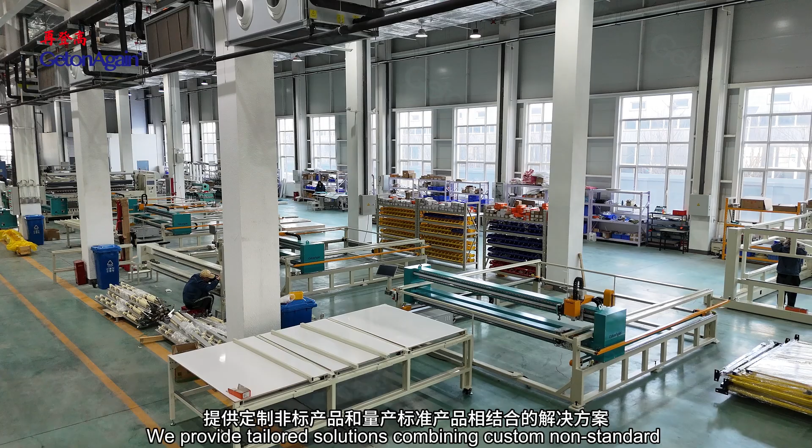We provide tailored solutions combining custom non-standard products with mass-produced standard products, including mechatronic machines, automated production lines, and intelligent factory solutions.

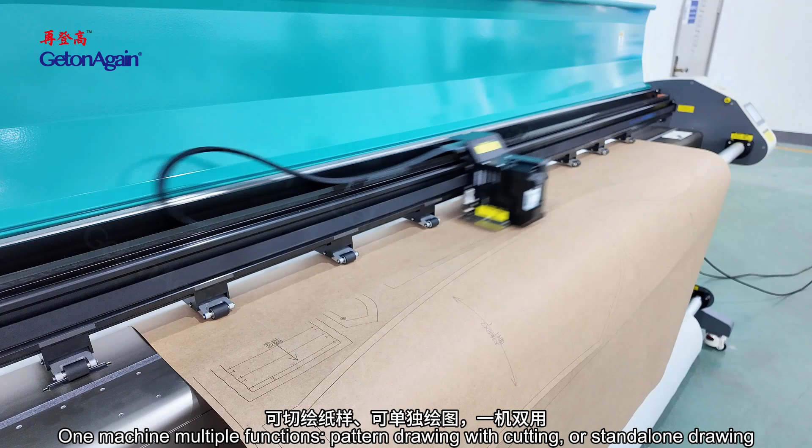Pattern room equipment includes the magnetic inkjet plotter: 2 cartridge version with maximum printing speed at 110 square meters per hour, and 4 cartridge version with maximum printing speed at 200 square meters per hour. The vertical inkjet cutting plotter offers multiple functions in one machine—pattern drawing with cutting, or standalone drawing. Its high-quality rotary cutting knife can cut paper as light as 80 grams per square meter for sample design, saving costs.

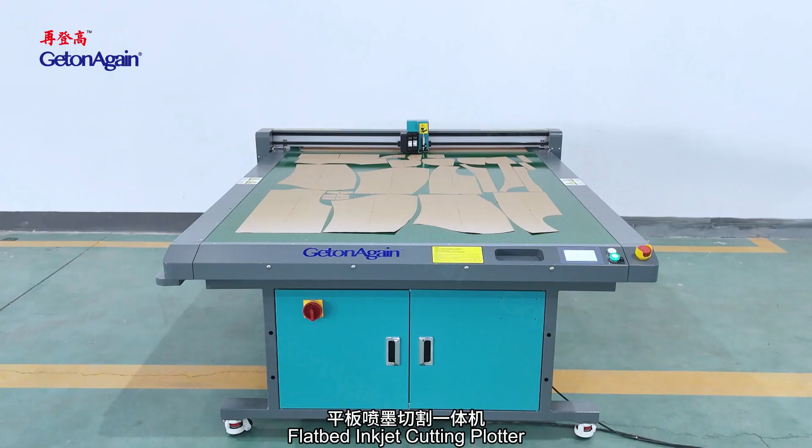The flatbed inkjet cutting plotter offers full speed map printing and cutting function, suitable for personalization. It can be configured with a long knife or short knife, and optional fixed knife sleeve or elastic knife sleeve, suitable for cutting various materials.

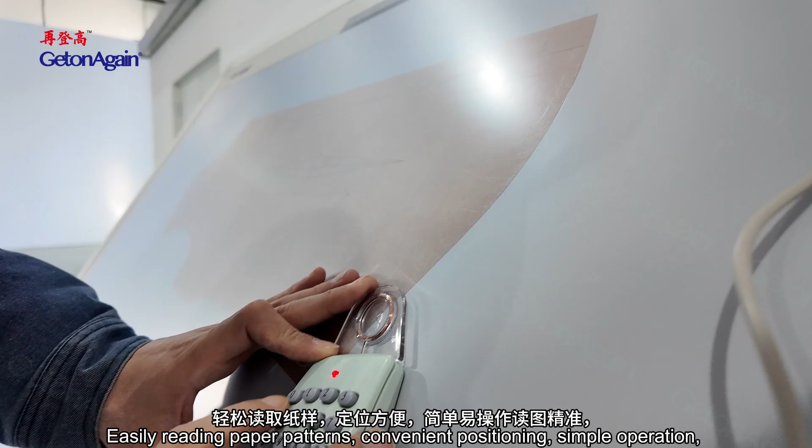The digitizer easily reads paper patterns with convenient positioning and simple operation, accurately reading patterns to speed up design. It is a powerful tool for digitizing traditional manual drawings, and can be used in various fields such as clothing industry, fashion design, surveying and mapping, mining, stamping, and environmental protection.

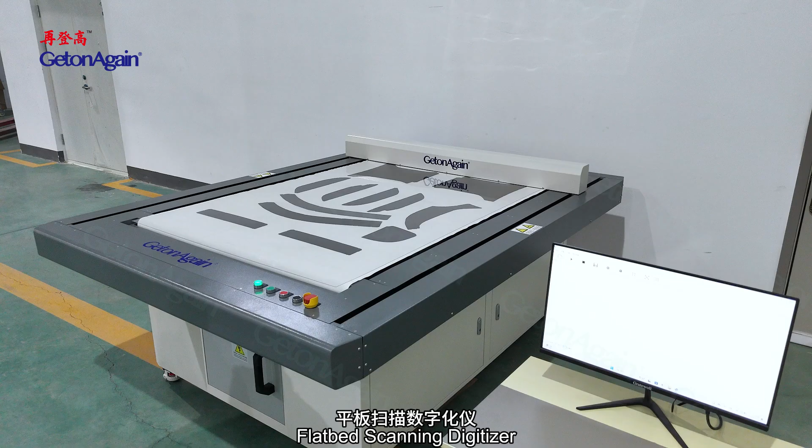The flatbed scanning digitizer starts with one button after placing scanning pieces, using vacuum absorption for auto scanning and auto transmission. Depending on the model, it supports ultra-long width scanning, with scanning speed up to 7,200 mm per minute and scanning resolution of 150 to 300 dpi, producing a high definition panoramic 1:1 image to ensure effective identification of contours, notches, and inner holes.

Cutting equipment includes the automatic spreading machine, which easily sets the spreading method, length, speed, quantity, and sections with intuitive, simple operation. It offers dual use for both knit and woven fabrics, suitable for t-shirts, children's clothing, loungewear, and toy textiles.

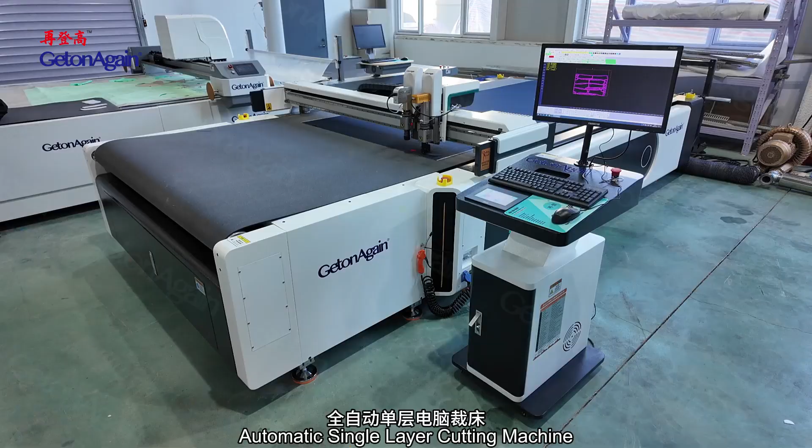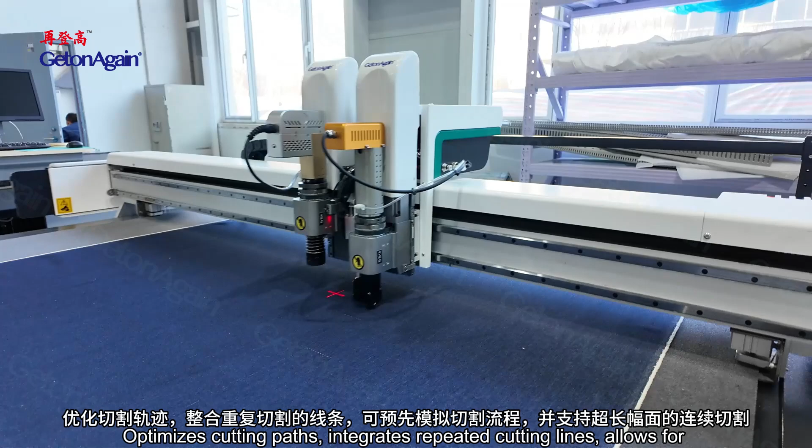The automatic single layer cutting machine requires no specialized cutting molds—cutting can be performed precisely by directly importing CAD design drawings into the equipment. It optimizes cutting paths, integrates repeated cutting lines, allows pre-simulation of the cutting process, and supports continuous cutting for extra long materials.

The stripe and plaid matching cutting machine is equipped with a few HD industrial cameras that, according to capture size, perform intelligent combination, ensuring high accuracy fabric image capturing.

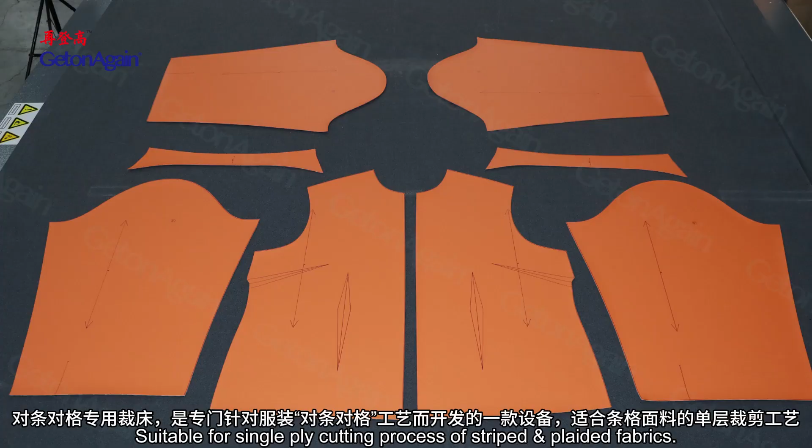The stripe and plaid matching auto cutter is equipped with double knives and pen draw punching working mode, specially designed for various stripes and plaids fabric cutting in single ply. For high-end clothing customization, the effect of the alignment match stripe and plaid process has become an important measurement of quality for this type of clothing. This auto cutter is specially developed to meet matching stripe and plaid clothing requirements, suitable for single ply cutting of striped or plaided fabrics.

The automatic multi-layer cutting machine combines micron-level intelligent sensing components with an intelligent control system to achieve dynamic compensation and correction of cutter deformation during cutting operations, significantly reducing errors between the top and bottom layers of fabric during cutting, enabling truly high-precision intelligent cutting.

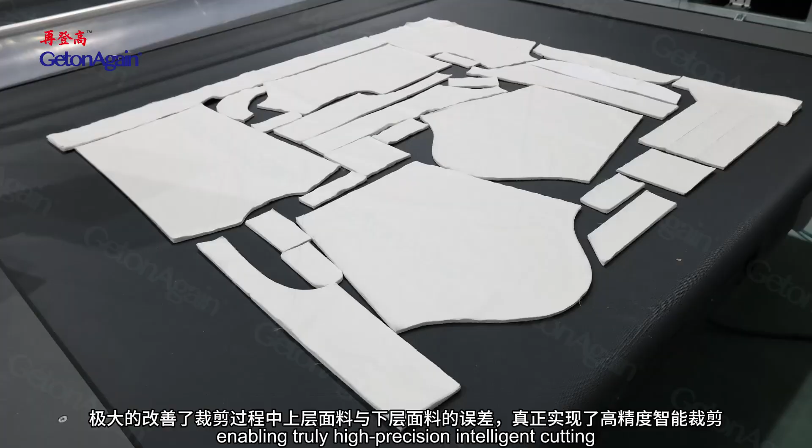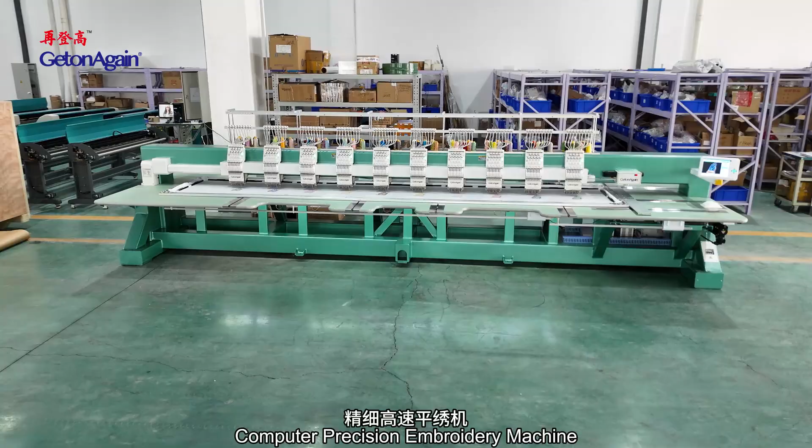Embroidery equipment includes the Cloud Smart Teaching Embroidery Machine, suitable for integrated theoretical and practical teaching of computer embroidery in fields such as fashion and apparel design, clothing design and engineering. The Computer Precision Embroidery Machine features a high-speed sewing head with extremely low failure rates, long service life, low noise, and stable, reliable quality, suitable for embroidering small letters, premium garments, high-end home textiles, footwear, hats, and automotive products with embroidery.

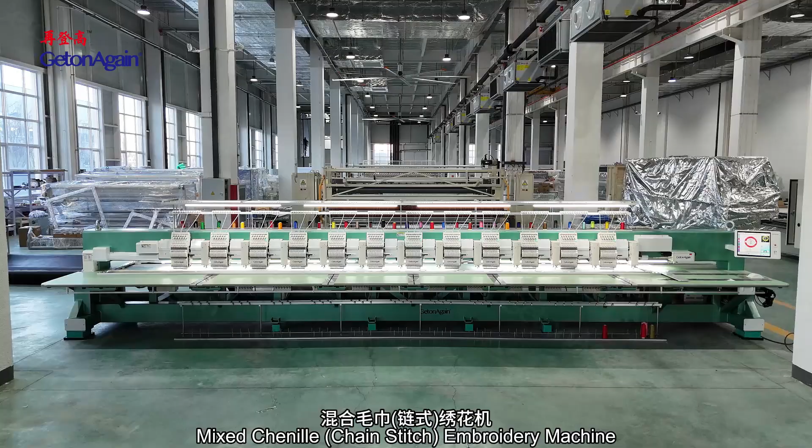The mixed chenille chain stitch embroidery machine features mixed embroidery capability—according to color sequence settings, it can switch between chenille embroidery and flat embroidery, simplifying operation. The chenille needle height can be adjusted across 10 levels according to chenille pile height or chain stitch thread thickness.

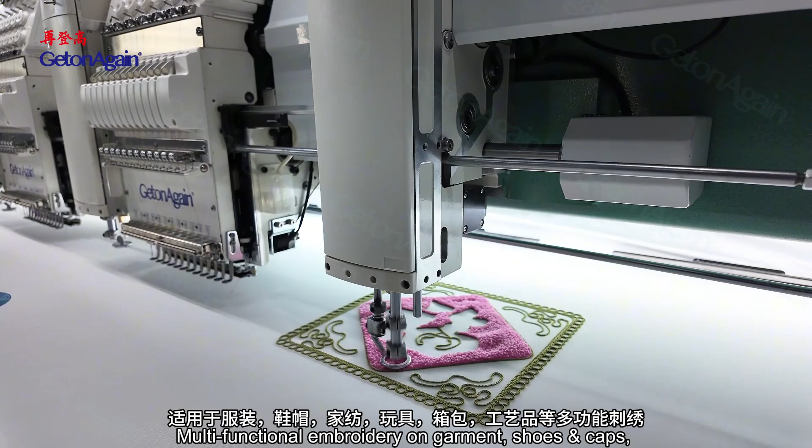This multifunctional embroidery machine works on garments, shoes, caps, home textiles, toys, bags, luggage, and art crafts. The multi-head tubular embroidery machine series is suitable for embroidering flats, caps, garments, shoes, belts, and bags.

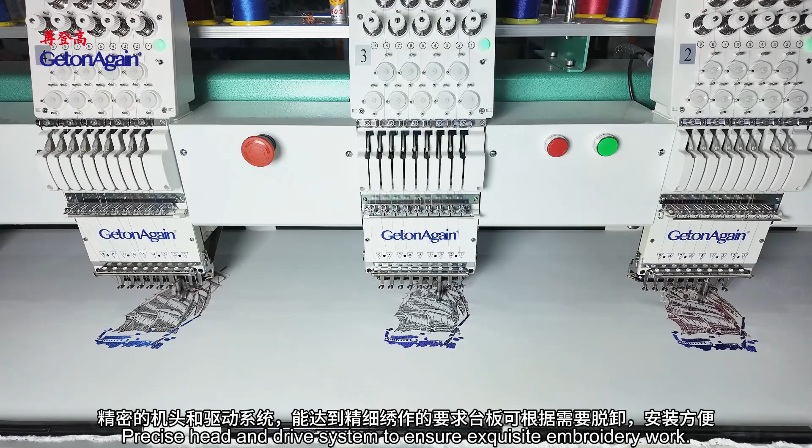Features include auto thread trimmers, auto color change, auto thread break detection, a 270 degree wide angle cap system, red light locating, LED lighting, and a precise head and drive system to ensure exquisite embroidery work. Drop tables are easy to lift up and down. Multiple heads greatly improve work efficiency, suitable for embroidery shops and factories of a certain scale.

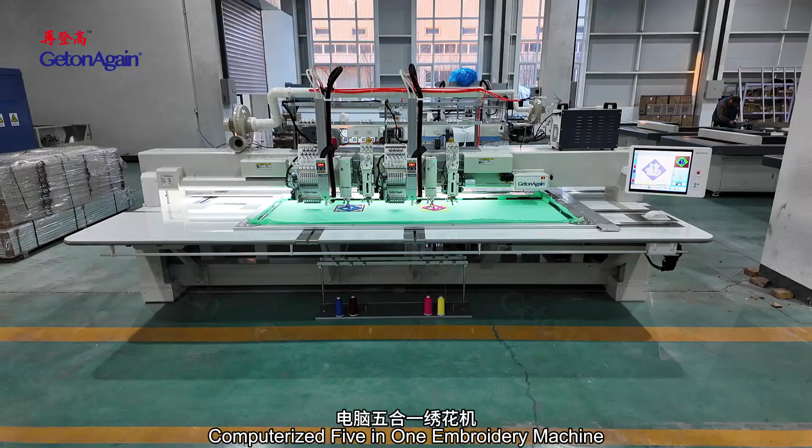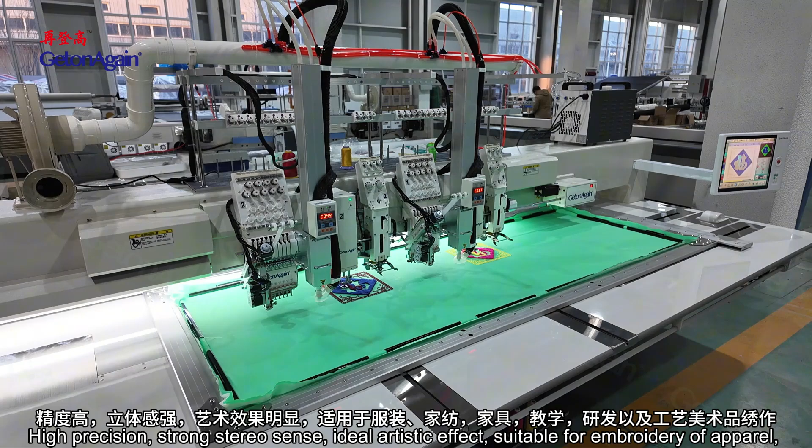The computerized 5-in-1 embroidery machine integrates five functions in one machine: flat embroidery, quilting, tape cording embroidery, chenille and chain stitch embroidery, double sequin device, and laser cutting function. It delivers high precision, strong stereo sense, and ideal artistic effect, suitable for embroidery of apparel, home textile, furniture, teaching, design, and arts and crafts.

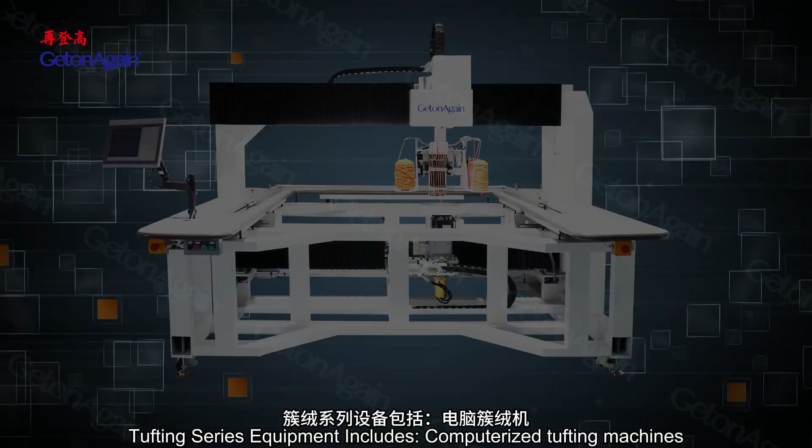Tufting series equipment includes computerized tufting machines with a rotary tufting head that moves at any angle, avoiding positive-negative stitching difference, for higher efficiency and better tufting results. Suitable for various rugs, carpets, hanging carpets, tapestries, and other flooring decorative and home furnishing products.

Laser equipment includes the small format camera positioning laser engraver cutting machine, which supports survey recognition processing with options for full sheet recognition followed by cutting, or simultaneous recognition and cutting. It features multi-template mixed cutting, allowing recognition and positioning of different patterns to be completed in a single operation.

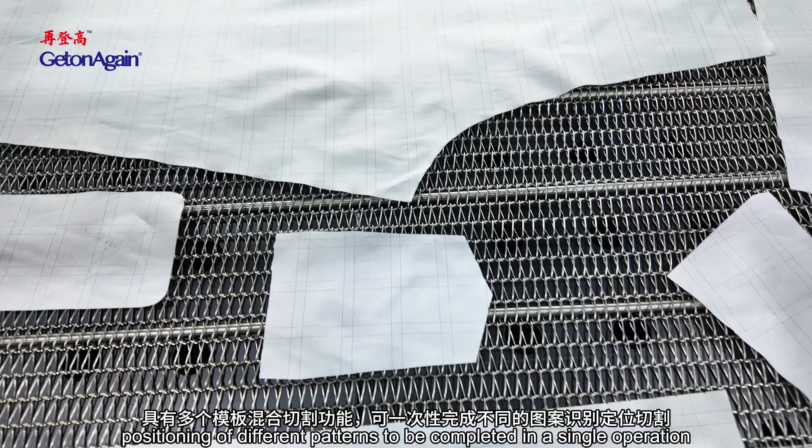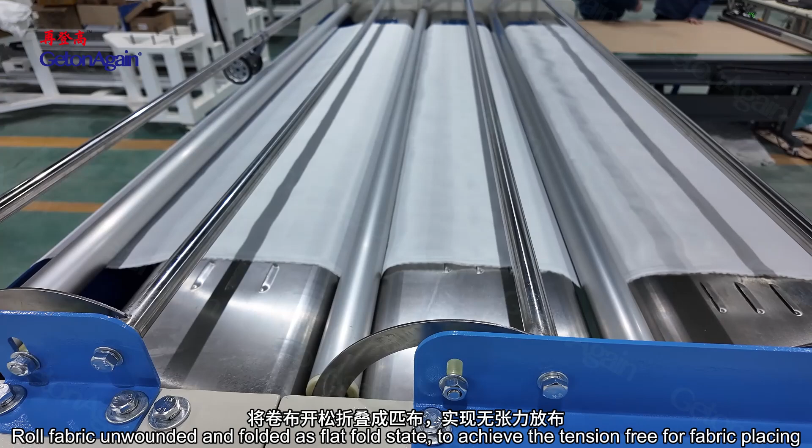Pre-sewing auxiliary equipment includes automatic edge alignment, relaxing machine, and air blowing. Roll fabric is unwound and folded in a flat fold state to achieve tension-free fabric placing. A wave-type air blowing device relaxes the fabric during the loosening process.

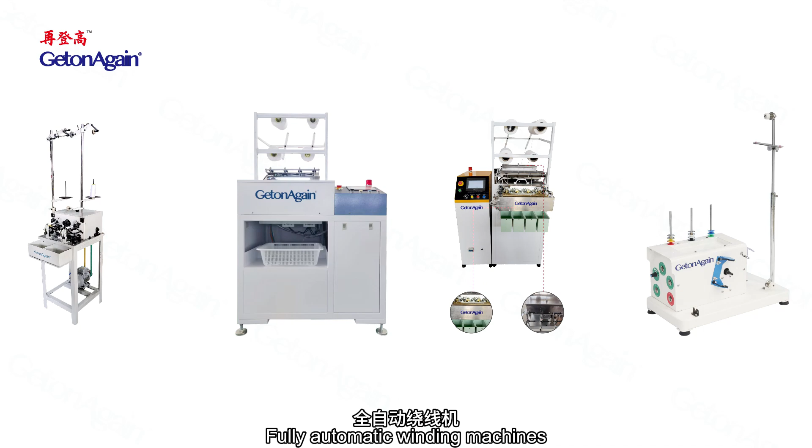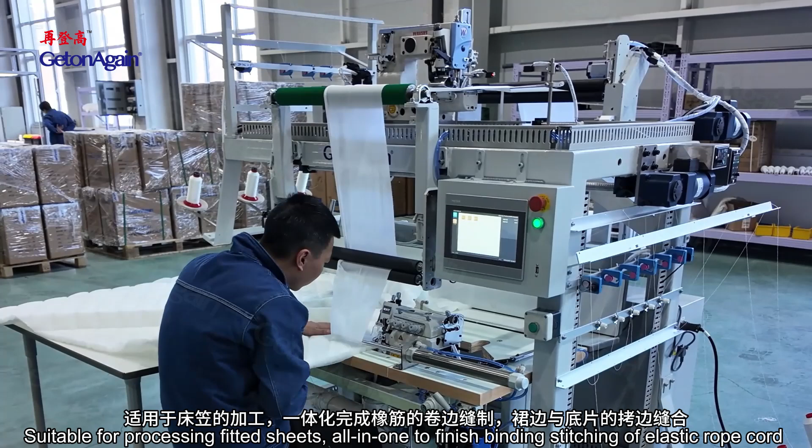Fully automatic winding machines. Sewing equipment includes an automatic mattress protector skirting sewing machine with interlock and overlock, suitable for processing fitted sheets, all-in-one to finish binding stitching of elastic rope cord and bed skirt, and overlocking of bed skirt to mattress protector topper layer.

Pattern sewing machine. This machine can easily sew 1200D thick thread with a thickness of 12mm, features a 2 times large rotary hook, automatic thread trimming, and a maximum sewing speed of up to 2500 RPM.

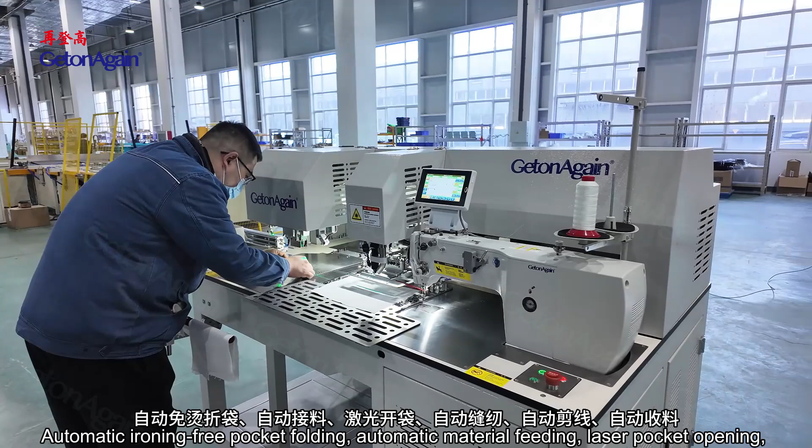Automatic laser pocket opening machine: automatic ironing-free pocket folding, automatic material feeding, laser pocket opening, automatic sewing, automatic thread trimming, and automatic material collection.

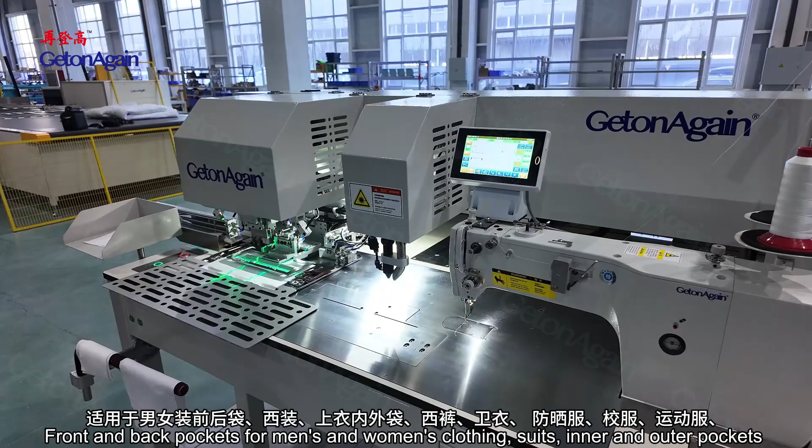Used for front and back pockets for men's and women's clothing, suits, inner and outer pockets of jackets, dress pants, hoodies, sun protection clothing, school uniforms, sportswear, cotton padded jackets, down jackets, workwear, jackets, uniforms, trench coats, cashmere coats, blankets, and polo shirts. Quilt edge binding machine.

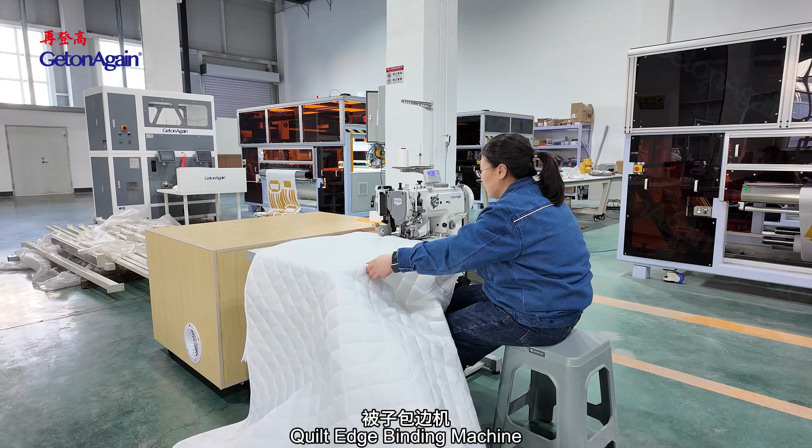Features single needle compound feed, achieving cutting, binding, and sewing in one seamless operation. An enlarged right side waste discharge port with pneumatic waste discharge assistance ensures smoother disposal of waste generated during edge cutting.

Special synchronized feeding structure, including alternating presser foot, needle, feed dog, and binding attachment, ensures no wrinkles or misalignment during straight line or corner sewing, for a flawless binding effect.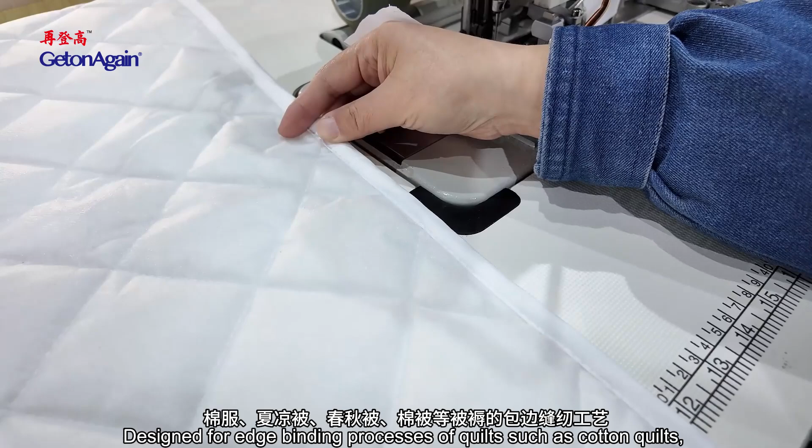Designed for edge binding processes of quilts, such as cotton quilts, summer quilts, spring and autumn quilts, and other bedding items.

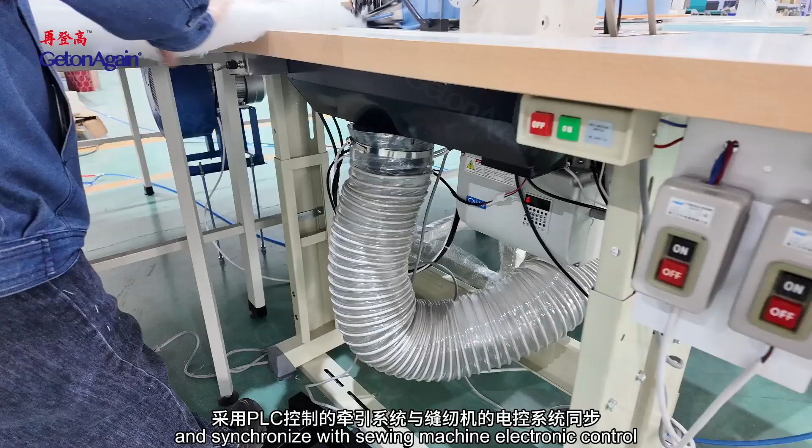Quilt and mattress binding with pulling sewing workstation. Equipment factory standard provides an air floating table and automatic pulling device, making the sewing worker's operation easier and smoother. Equipped with PLC controlled pulling device synchronized with sewing machine electronic control, these two machines work at the same speed and synchronize direction.

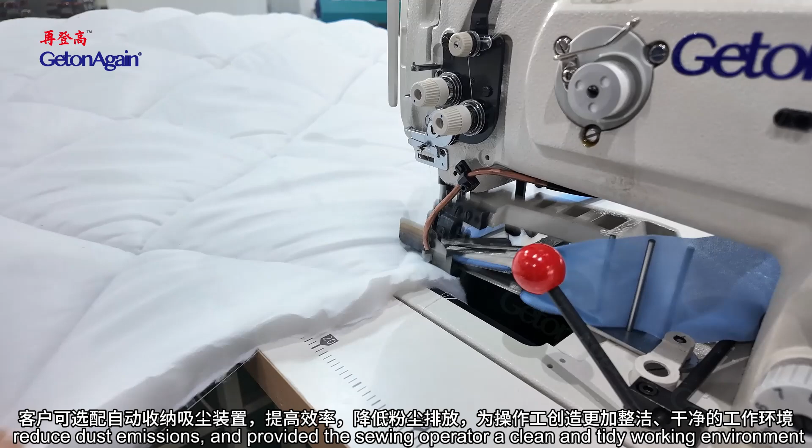An optional automatic storage and vacuuming device improves efficiency, reduces dust emissions, and provides the sewing operator a clean and tidy working environment. The binding result is rich and has a strong, solid feel. Corners are smooth and nice, with evenly stitched length, no hairy edge, no edge folding, and no corner raising effect or other negative symptoms.

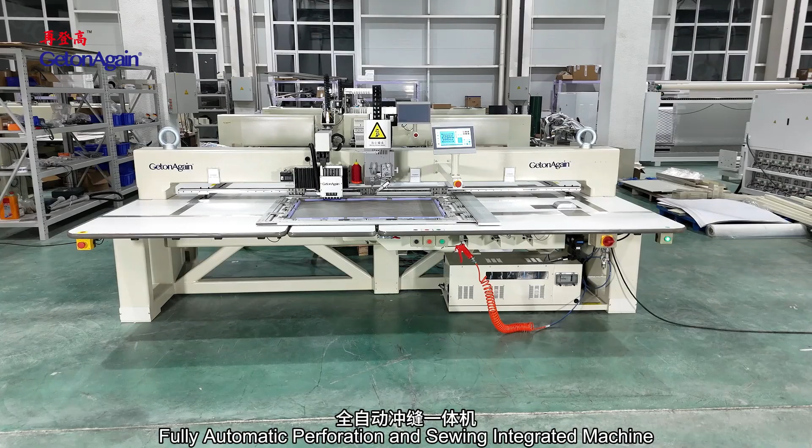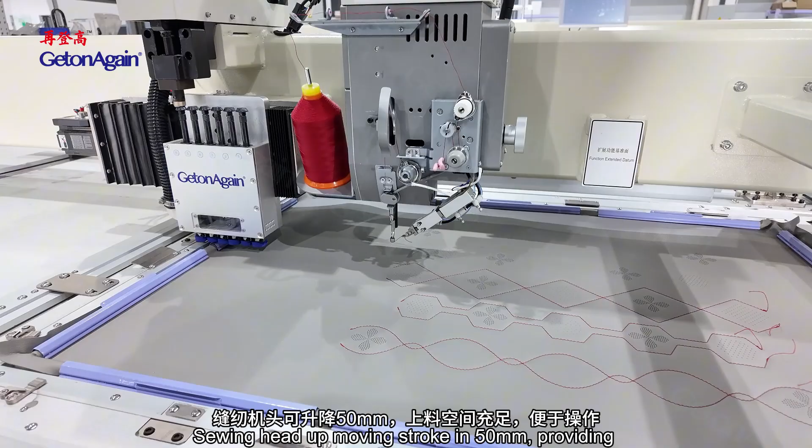Fully automatic perforation and sewing integrated machine. The punching machine head is specifically designed and developed for leather materials, equipped with various round punching tool specifications. Sewing head up-moving stroke is 50mm, providing sufficient space for material loading and easy operation.

Suitable for perforation and sewing processes of various types and thicknesses of genuine leather and microfiber leather used in car seats, automotive interiors, aircraft seats, luggage, furniture, and more.

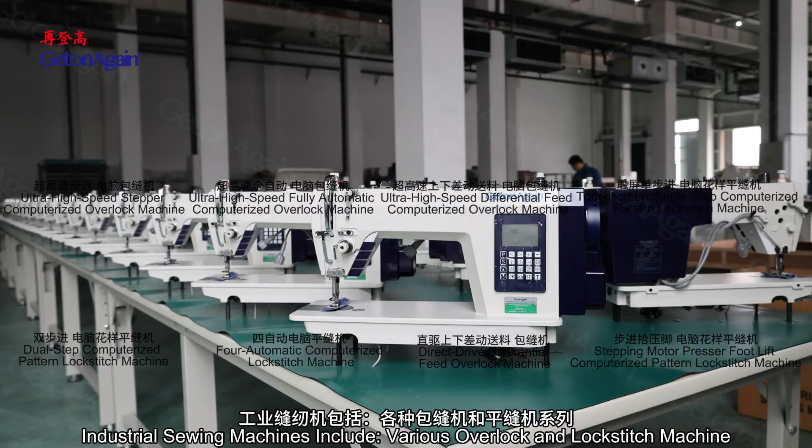Multi-hole bar tacking machine: press arm and sewing frame work synchronously, ensuring high precision bar tacking, suitable for chair pads, cushions and pillows, and all items with fillings requiring bar tacking for reinforcing sewing work. Industrial sewing machines include various overlock and lock stitch machines.

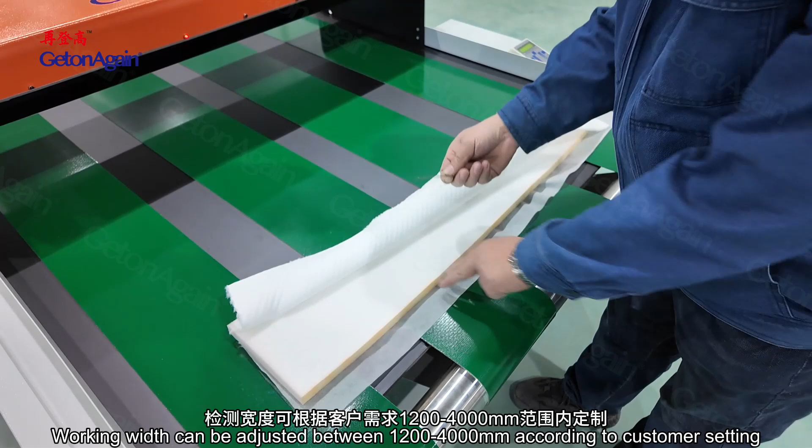Post-finishing equipment includes a needle detector, applicable for large bulky products requiring ferromagnetic metal detection, for example bedding. Working width can be adjusted between 1,200 to 4,000mm according to customer setting.

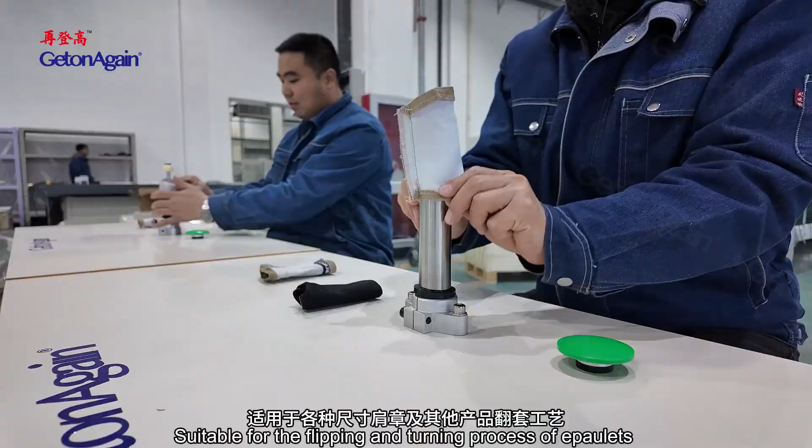Epaulet flipping machine replaces manual operation with high efficiency, safety and reliability, suitable for the flipping and turning process of epaulets or straps of various sizes and other products.

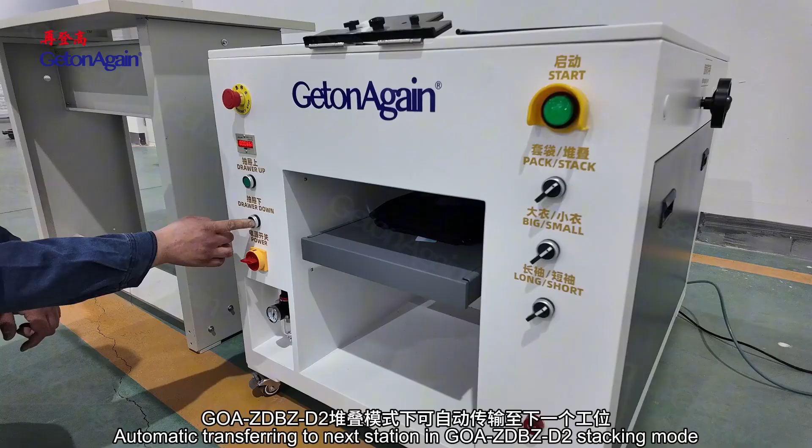Automatic folding and packaging machine: economical, small floor space, simple operation, standard folding effects, with automatic transferring to the next station in GOA-ZDBZ-D2 stacking mode. Two working modes, bagging and folding, are adjustable, and both folding width and length are adjustable within a certain range.

Suitable for T-shirts, polo shirts, hoodies, thermal wear, pants, and lightweight jackets, etc.

Single and dual heads cap pressing machine for baseball caps. Steam time, cap clamping time, steam output, and air consumption can all be automatically adjusted. A built-in steam generator eliminates the need for an external boiler, with automatic water supply, suitable for bulk order production needs. Using a robotic arm, it can automatically grip the cap.

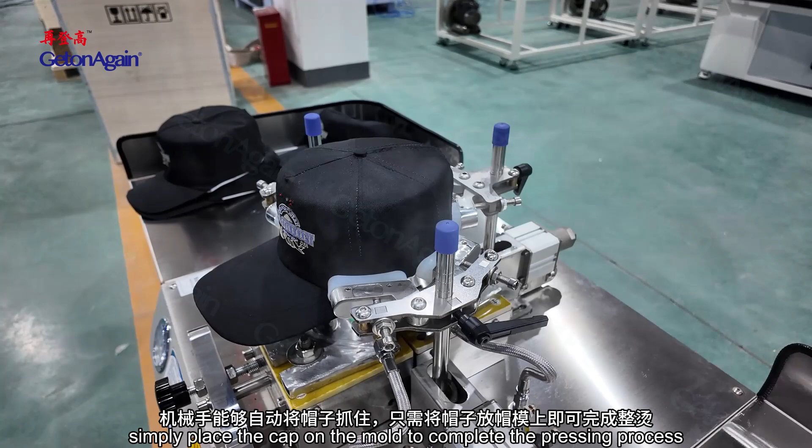Simply place the cap on the mold to complete the pressing process.

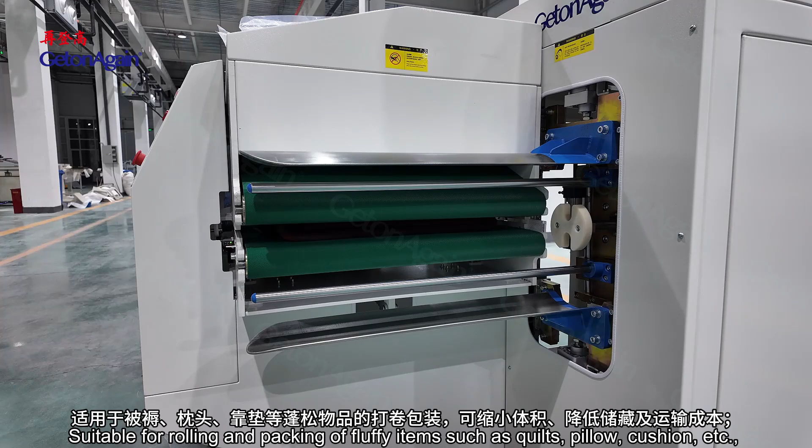Quilt roll packing machine, suitable for rolling and packing of fluffy items such as quilts, pillows, cushions, etc., to reduce volume and storage, as well as lower transportation cost. The packing item is auto-fed from backward to forward by the belt during the compressing process and rolled to pack into the bag.

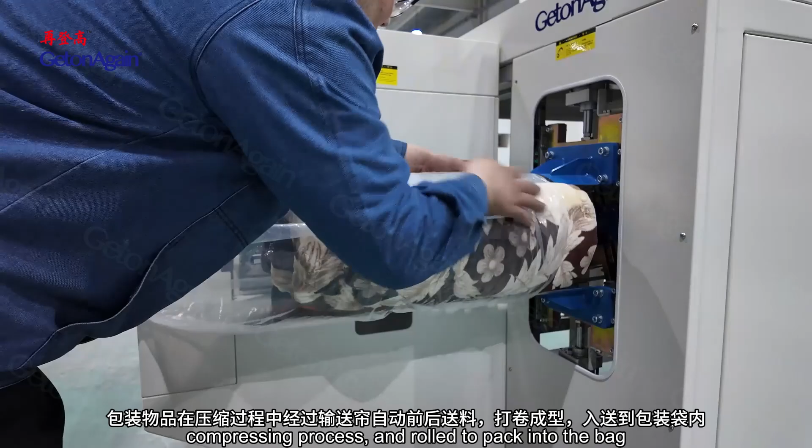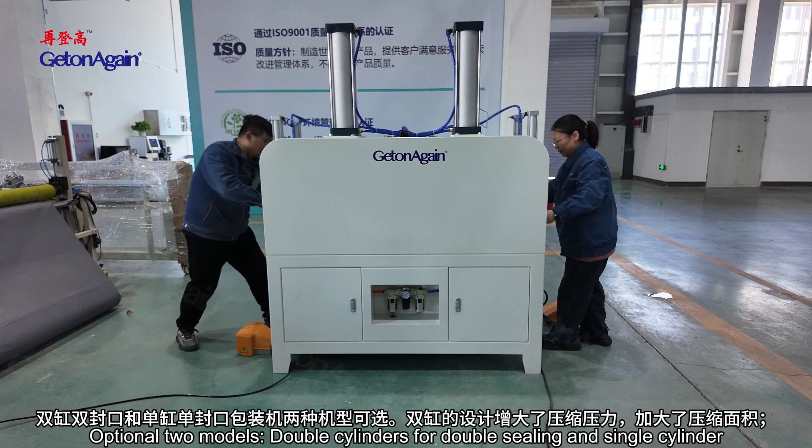Double cylinders, double operation, optional models: double cylinders for double sealing, single cylinder for single sealing. The double cylinder design increases the compression pressure and area. In double seal design, two workers operate two products at the side of the machine, greatly improving work efficiency, suitable for compressed packing of pillows, cushions, bedding, plush toys and other products.

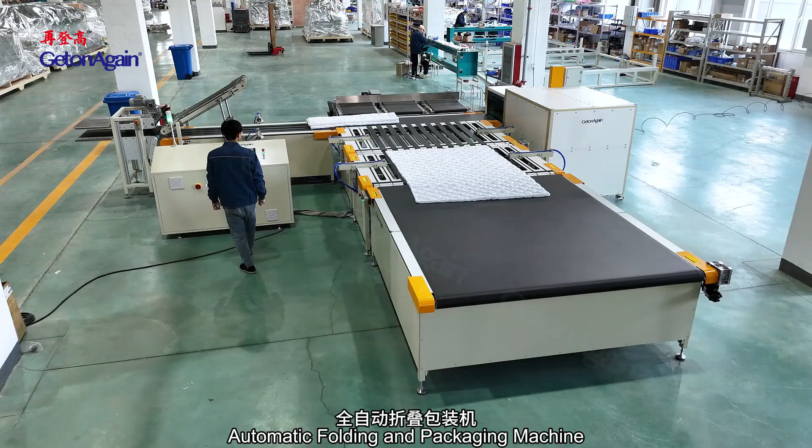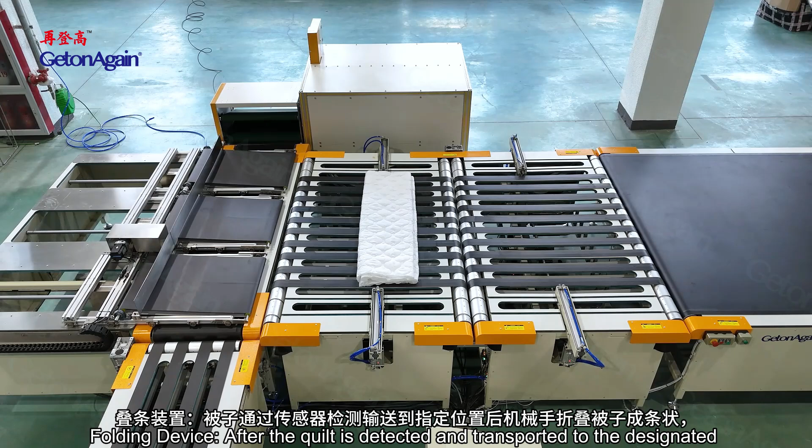Automatic folding and packaging machine, the equipment is mainly composed of a folding device, rolling device, and stacking and compressing conveyor device. In the folding device, after the quilt is detected and transported to the designated position by sensors, a robotic arm folds the quilt into a strip shape.

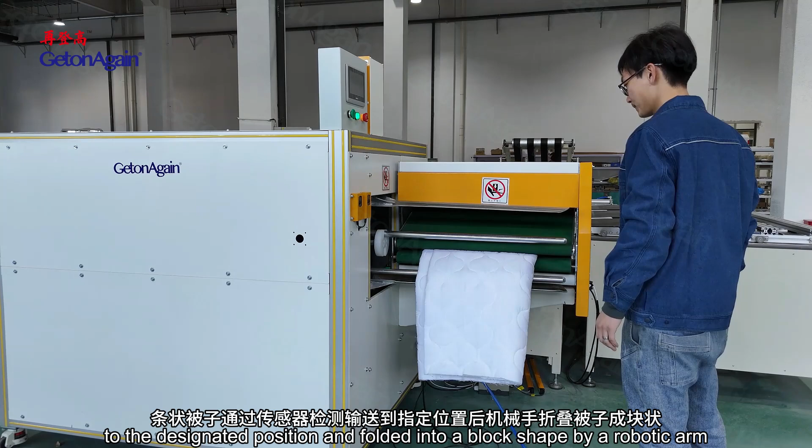After being detected by sensors, the strip-shaped quilt is transported to the designated position and folded into a block shape by a robotic arm. In the rolling device, the strip-shaped quilt is transported to the automatic rolling device to complete the rolling process.

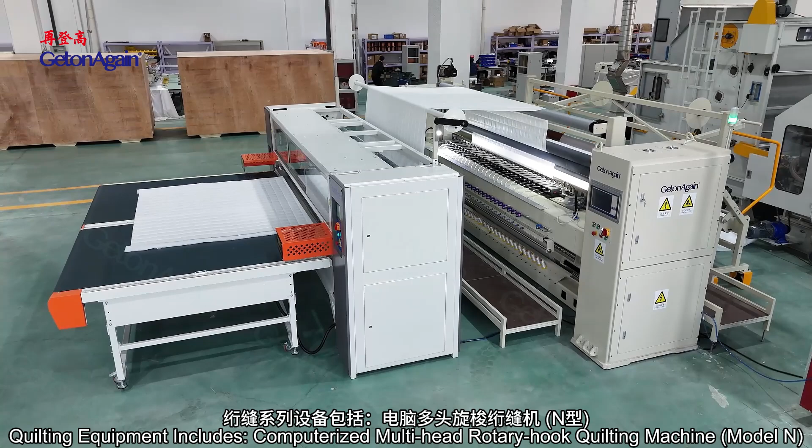Quilting equipment includes the computerized multi-head rotary hook quilting machine model N, a double row lock stitch multi-head quilter with large rotary hook. Max speed of 1,500 RPM, more than 2 to 3 times that of a normal shuttle quilting machine, greatly improving work efficiency. Three-fold capacity rotary hook means less bobbin changing frequency, beautiful stitches, no lost stitch, no thread loops.

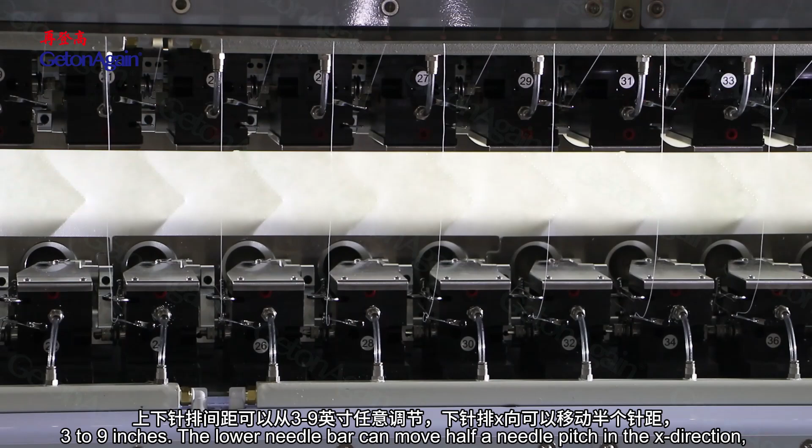Computerized multi-head rotary hook quilting machine model E features a 5-time jumbo rotary hook, less bobbin changing frequency, beautiful stitches, no lost stitch, no thread loops. The interval between the upper and lower needle bars can be adjusted to any value from 3 to 9 inches. The lower needle bar can move half a needle pitch in the X direction, so that quilting needle bars of different sizes and patterns can be combined, especially for some non-standard size patterns, achieving a unique effect.

Computerized multi-needle shuttle quilting machine with flying shuttle, for quilting of fitted sheets, bed covers, summer quilts, and clothing products with quilting pattern.

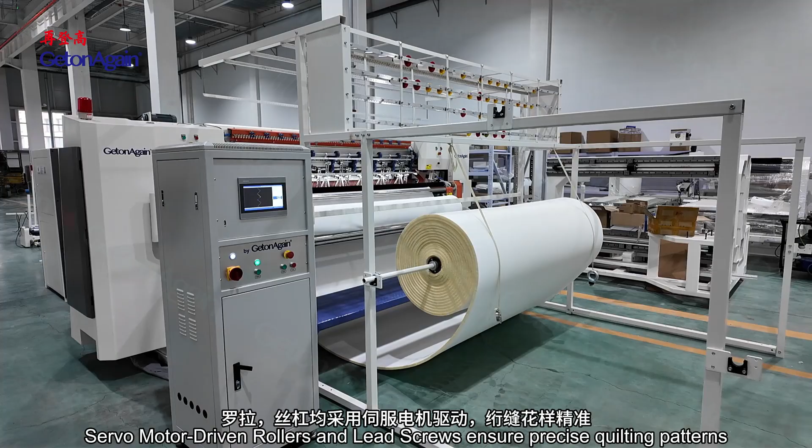Computerized multi-needle chain stitch quilting machine. Servo motor-driven rollers and lead screws ensure precise quilting patterns, suitable for mattresses, mattress covers, sofas, bedding, home textiles and home decor.

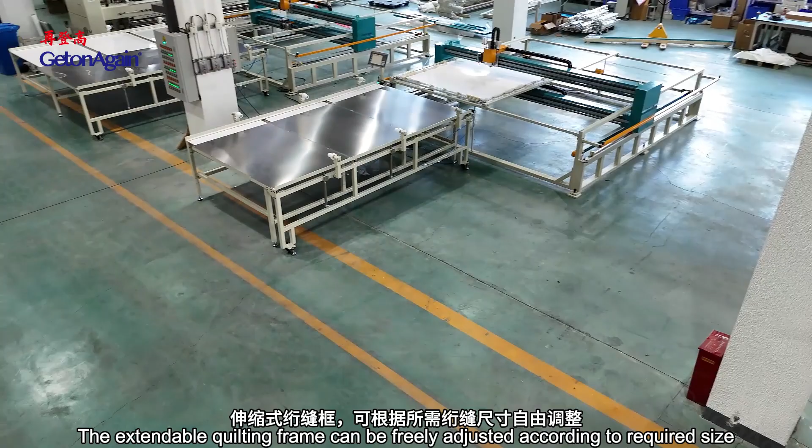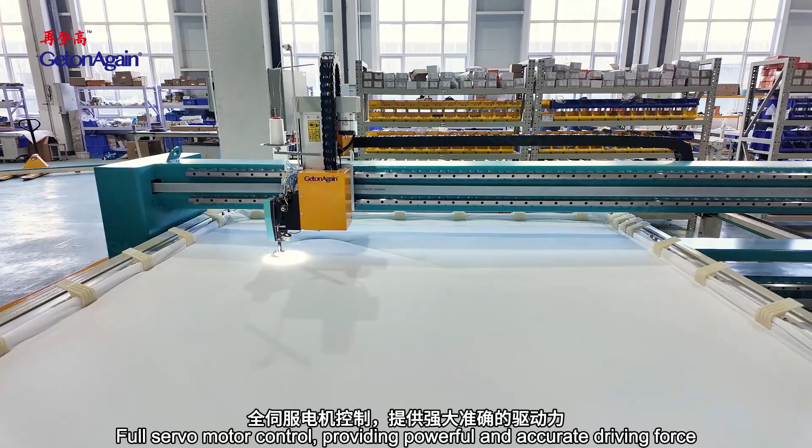Computerized single-needle quilting machine lifting head. The extendable quilting frame can be freely adjusted according to required size. GetonAgain quilting head with independent presser foot drive, suitable for various materials with different thickness. Full servo motor control provides powerful and accurate driving force. Automatic lifting head allows easy change of the frame after finishing quilting.

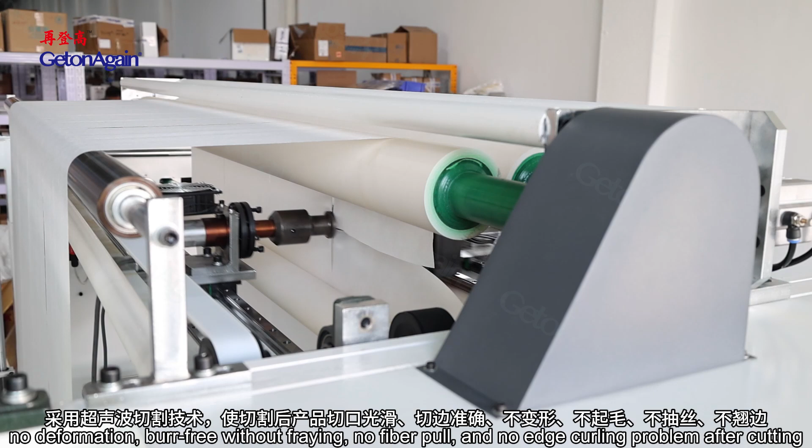Ultrasonic equipment includes the ultrasonic slitting machine, which adopts ultrasonic cutting technology ensuring smooth cutting edges, precision edge cutting, no deformation, burr free without fraying, no fiber pull, and no edge curling problem after cutting. Cutting rollers and patterns can be customized to meet various needs.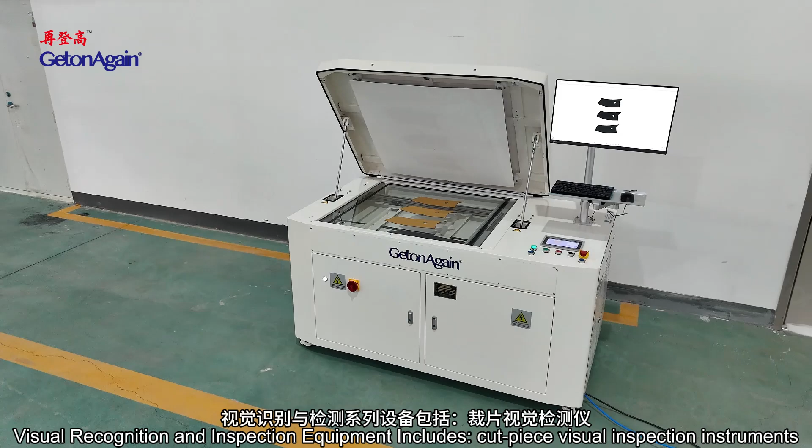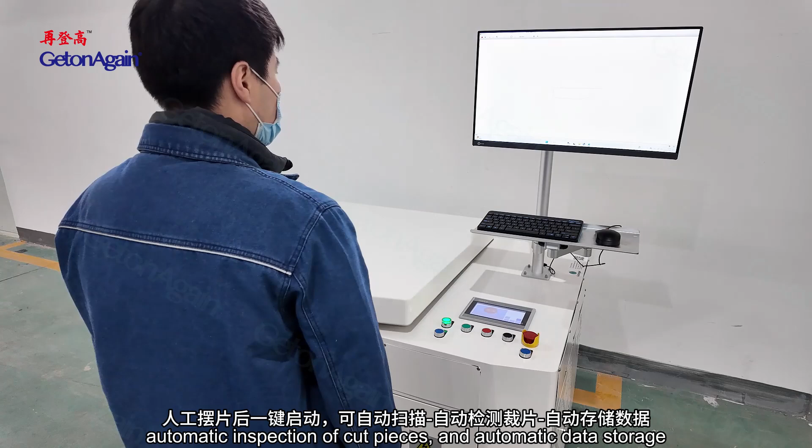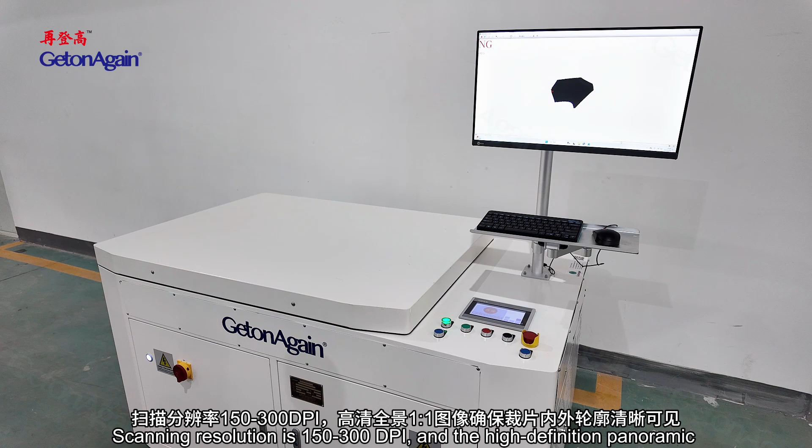Visual recognition and inspection equipment includes cut piece visual inspection instruments. After manual placement, one-click start allows for automatic scanning, automatic inspection of cut pieces, and automatic data storage. Scanning speed can reach up to 120 mm per second, with no need for additional lighting, ensuring reliable use in all weather conditions. Scanning resolution is 150 to 300 dpi, and the high-definition panoramic one-to-one image ensures that the inner and outer contours of the cut pieces are clearly visible.

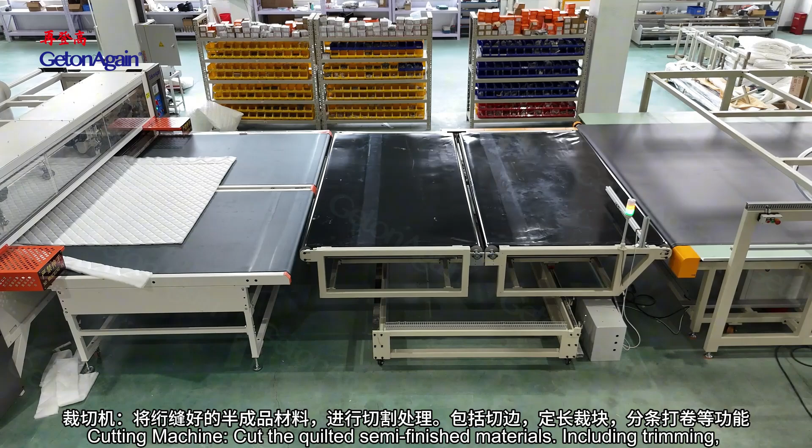Automated production line series includes the multi-needle quilting machine, flying shuttle and cutting machine, and 4-side tape binding machine production line. The multi-needle quilting machine quilts and fixes the raw materials with lock stitches, mainly used to process quilt cores and cushions. The cutting machine cuts the quilted semi-finished materials, including trimming, fixed length cutting, slitting and rolling, and other functions.

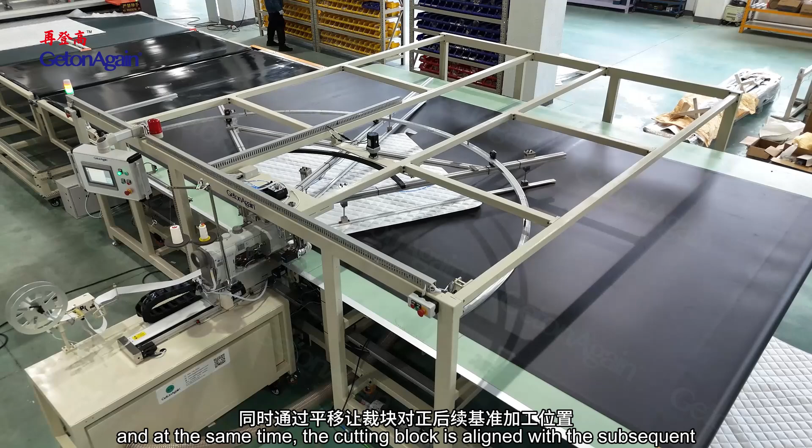Alignment platform: a material transfer alignment mechanism. The cutting block waits to enter the next sequence on this platform, and at the same time, the cutting block is aligned with the subsequent reference processing position by translation.

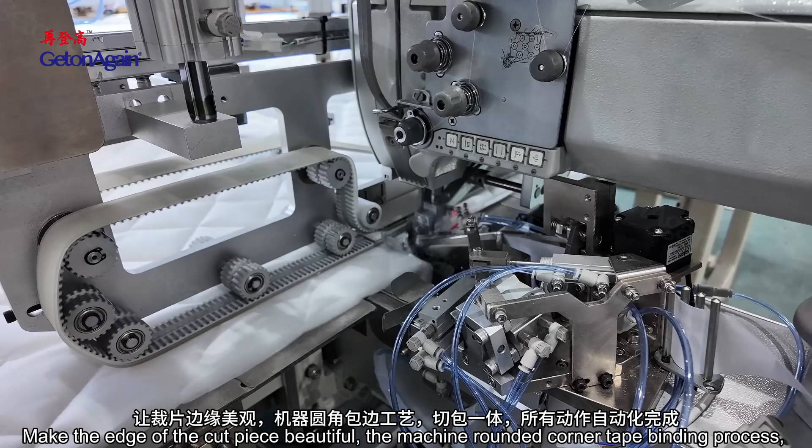Automatic tape binding machine: the cutting piece is processed by the tape binding machine to make the edge of the cut piece beautiful, using a machine rounded corner tape binding process. The cutting and tape binding are integrated, and all actions are completed automatically.

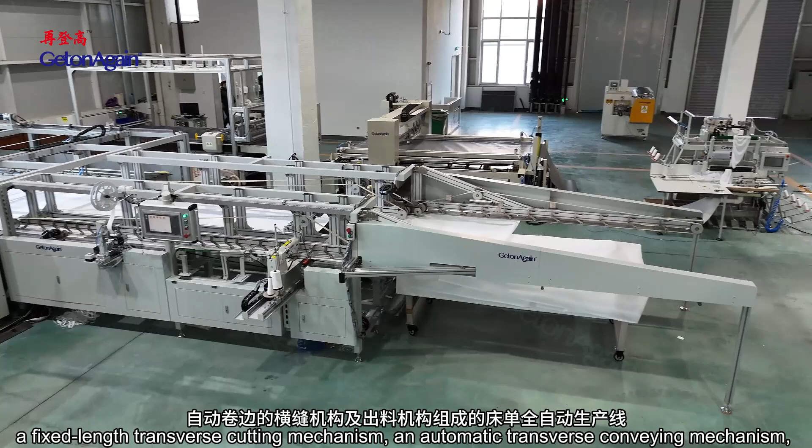Automatic bed sheet production line: a fully automated bed sheet production line composed of a feeding mechanism, an adjustable width longitudinal sewing mechanism, a fixed length transverse cutting mechanism, an automatic transverse conveying mechanism, an automatic hemming transverse seam mechanism, and a discharging mechanism.

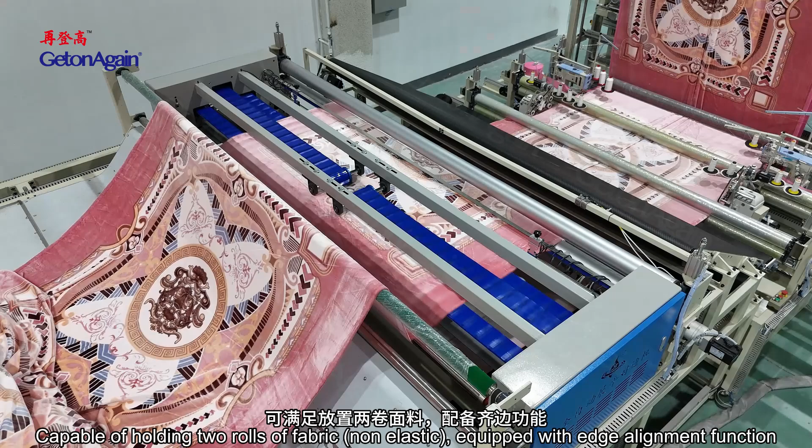Automatic blanket straight corner binding machine, capable of holding 2 rolls of non-elastic fabric, equipped with edge alignment function, automatically pulls and cuts into panels. Pulling lengths can be set freely. 4-side tape binding sewing process for inelastic blankets.

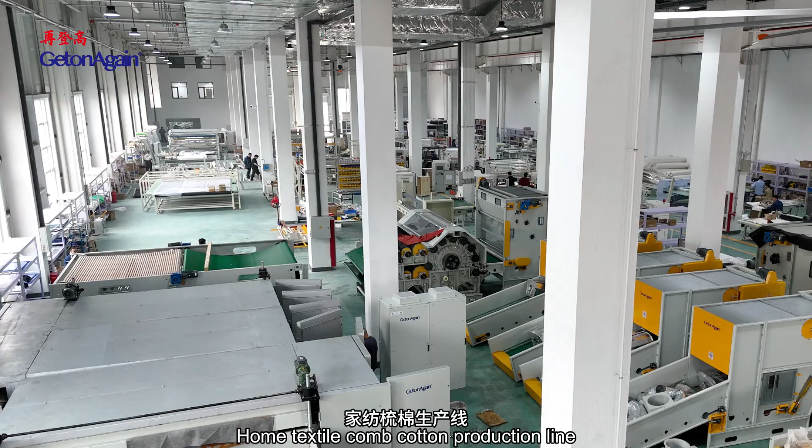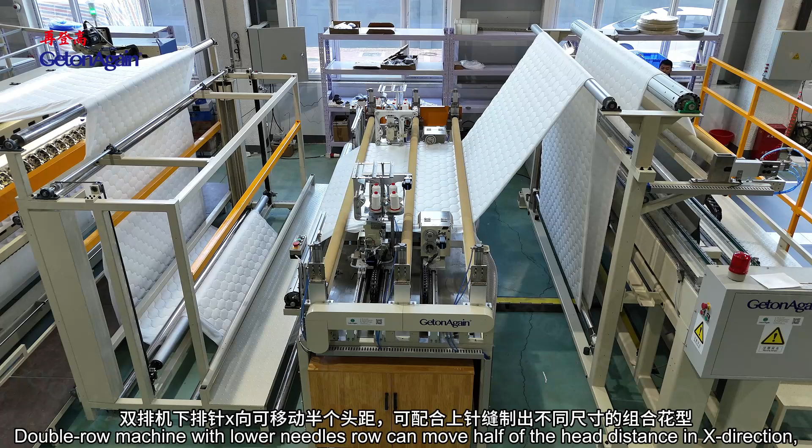Hometextile comb cotton production line. Computerized multi-head rotary hook quilting machine and 4-side edge sewing machine are capable of quilting patterns in various sizes without changing needle positions, greatly enhancing operational efficiency. The double row machine's lower needle row can move half of the head distance in the X direction, creating combination patterns of different sizes when coordinated with the upper needles.

Longitudinal sewing uses double chain stitch, with optional lock stitch or overlock stitch. Transversal sewing uses multi-needle chain stitch sewing. Transversal cutting occurs between the 4 stitches, cutting as per set length and feeding to the next sequence. The textile horizontal sewing machine performs the folding and sewing process for inelastic towels.

Garment CAD includes garment CAD, super nesting, template CAD, intelligent tufting CAD, wire stitching CAD, perforation and embroidery CAD.

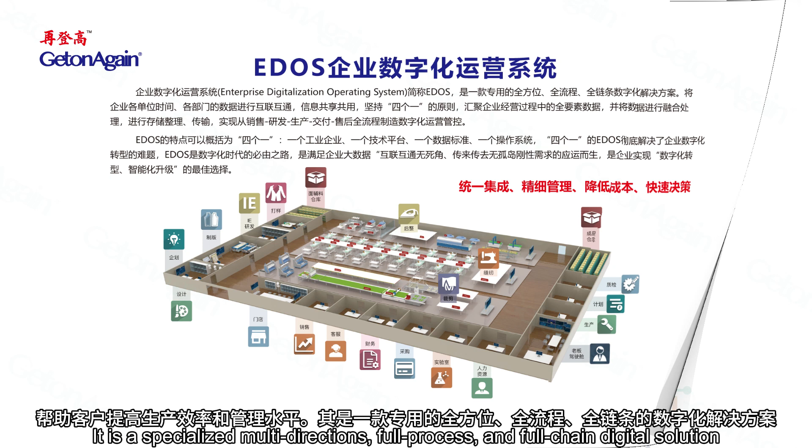In addition, GetonAgain has developed a digital operation and management system for industries such as garment processing and machinery manufacturing. This system helps customers improve production efficiency and management levels. It is a specialized multi-direction, full process, and full-chain digital solution. Its features can be summarized as the 4 ones: 1 industrial enterprise, 1 technology platform, 1 data standard, and 1 operating system. It is the optimal choice for enterprises to achieve digital transformation and intelligent upgrading.

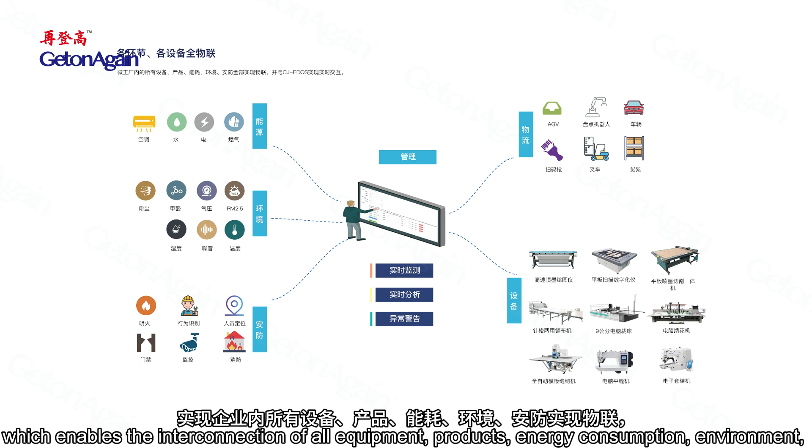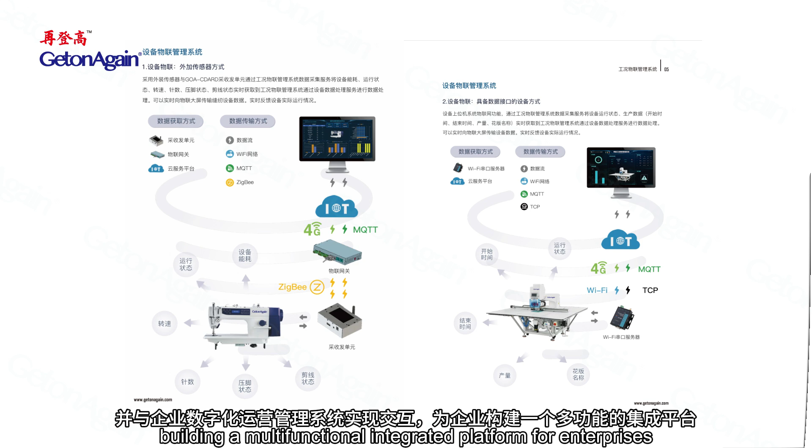Furthermore, by integrating Internet and IoT technologies, the company has developed an enterprise operating condition IoT management system, which enables the interconnection of all equipment, products, energy consumption, environment, and security within the enterprise. This system interacts seamlessly with the enterprise digital operation and management system, building a multifunctional integrated platform for enterprises. It enables functions such as data collection, real-time monitoring, data analysis, and remote management.